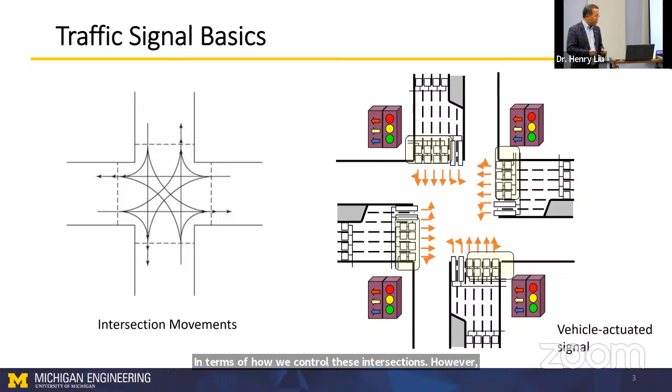However, we don't have a lot of these traffic signals. In terms of the overall number of traffic lights in the U.S., there are various estimates, but the latest estimate is 320,000 traffic signals in the US. That's roughly, on average, one traffic signal per 1,000 people in the US. I would say the majority of these, more than 50%, are so-called fixed time traffic signals, and 30–40% of these are so-called vehicle actuated.

By the way, those detectors could be detectors buried underneath the road, video cameras, or wireless detectors as well. So there are all sorts of detectors installed, location specific to the intersection. How we manage these detectors and the traffic signal timing plans is a very important task for any traffic management agency. City of Ann Arbor, Oakland County Road Commission, every county and every city has these traffic management agencies. They try to maintain these detectors if they have vehicle actuated signals, or maintain these signal timing plans to keep them up to date according to the traffic flow.

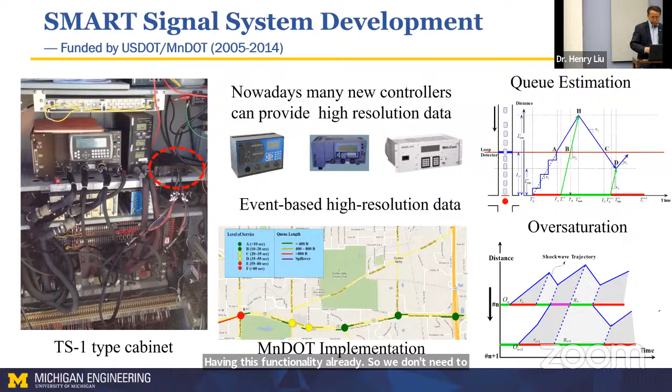After I came to Michigan, I started to work on connected vehicles. At the time, UMTRI was working on the Safety Pilot Model Deployment project. There were 20-some intersections instrumented with roadside units, and 2,850 vehicles instrumented with onboard units as well, so that the vehicles are able to communicate with the intersections through the communication device. At the time, it was still DSRC-based, dedicated short-range communication.

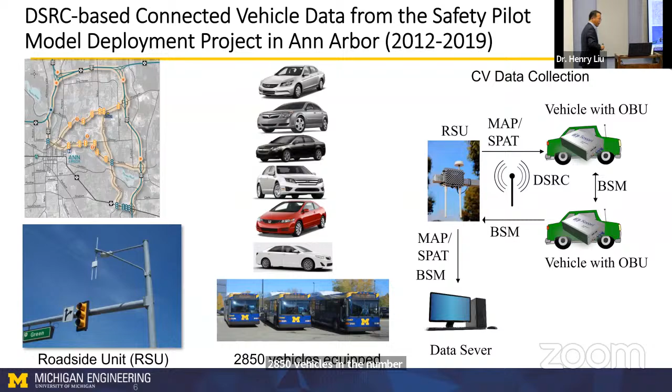So when the vehicle approaches the intersection, the vehicle broadcasts its basic safety message related to its position, speed and things like that. Those messages are received by the roadside unit. So the roadside unit has every connected vehicle's trajectory approaching the intersection. Not every vehicle, because we only have about 2,850 vehicles in the Ann Arbor area equipped with OBUs. So then we started to look at how we can utilize these near-intersection vehicle trajectories to help us manage these traffic lights better.

This is the Plymouth and Green intersection that many of you are very familiar with; it's not far from here. Let's look at phase 2, which is the main through phase from west to east in the afternoon, 3 to 6 p.m. The traffic flow is a lot of people leaving the city of Ann Arbor going home, right?

And so just look at the vehicle arrivals at this intersection. As I mentioned, we know the trajectory when they come to the intersection within the communication range. We know these connected vehicle trajectories. And so all of these are vehicle trajectories. And at the time, this is in 2016.

And so at the time, these traffic lights are adaptive. They work in real time, adaptively reacting to traffic flow. So the start time of the green and the end time of the green is not fixed. They're moving. Depending upon the traffic situation, the start and the duration of the green time is not the same from cycle to cycle.

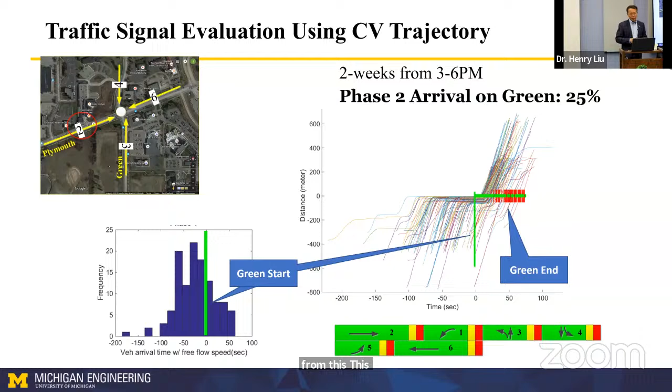Okay, so now look at the traditional detector data. I worked on detector data collection when I was in Minnesota, and after I came here, looked at trajectory data. Each has distinct advantages and disadvantages. Detectors are buried underneath the road, or you have a camera looking in that direction, and every vehicle that passes by can be captured. However, I can only capture that specific location, right? If I have a really long queue and the detector is here, I can't capture that. So it's difficult to use that information to manage these intersections.

Trajectory data, on the other hand, is almost everywhere. If we look at the trajectories vehicles provide, we can see they have very rich information. They approach the intersection, stop 100 feet from the stop bar, stop for like 30 seconds, and then leave. All this information is associated with the trajectory, so each individual vehicle provides very rich information.

However, it's not specific to a location. And we only have a few percent of vehicles that are connected. Not every vehicle is connected yet. Okay, so those are the differences. Each of these has advantages and disadvantages.

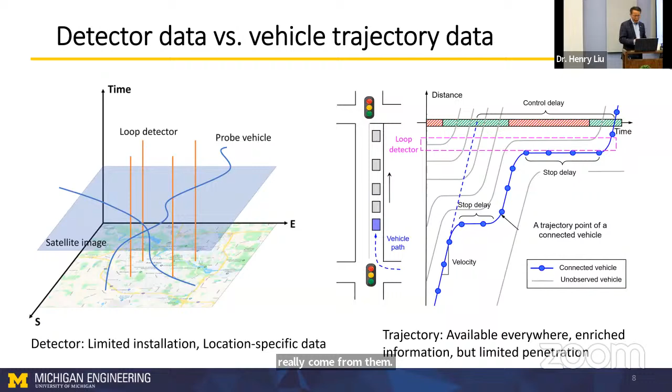Okay, and so then we look at it in terms of how we change our paradigm in terms of how we manage the traffic flow. In the traditional paradigm, we either use the detector data or we get the counts. Sometime when I was young, when I was a graduate student, I still used the counters to get the count myself. And so those are the things you have to do to retime the traffic light.

And then from that, you can estimate speed, density, these traffic flow parameters, you get the counts, volume, and then you put that into a simple traffic flow model. And then you can utilize the traffic flow model to do optimization, and then you can implement that into the real world. And you have to sort of verify that also for each signal retiming.

Well, with the proposed method, we're not gonna do this anymore. We're not gonna rely upon anything location specific at infrastructure. We only look at the connected vehicle trajectory data on the cloud. Okay, so the agency doesn't have to maintain that. So we get the trajectory data. And as I mentioned, each trajectory has a lot of information, has delays, stops, and things like that. We aggregate to get that information.

Now, we also then develop a new model connecting the traffic flow model together with the trajectories. Once we have that model, then we can utilize that new traffic flow model together with an optimization algorithm to optimize the traffic signal timing plan. And then we can implement that into the field, and then that loop runs again. Okay, so that's the new paradigm versus the old paradigm, which really relies upon detector data.

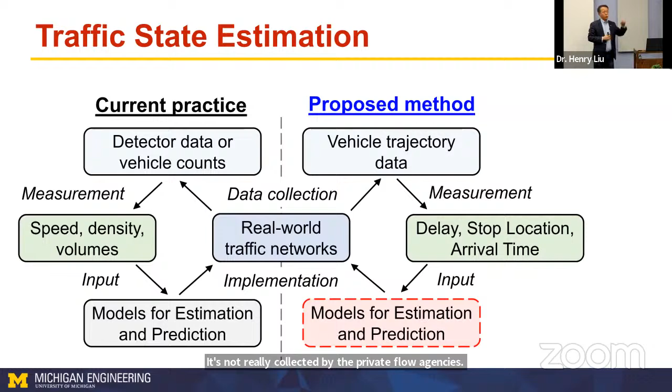Okay, so in our new paradigm, we rely upon vehicle trajectory data on the cloud. It's not really collected by the traffic agencies. But we can utilize that data to help traffic management agencies optimize their traffic signals. And so the difficulty is that we only have a few percent. We do not have a lot. We have a few percent, and then we want to leverage this few percent to do a better job to manage traffic signals.

And then also in traffic flow theory, we don't have a traffic flow model that works directly with trajectory data. All the traffic flow models work perfectly with volume, density and speed data, but they do not have connections directly to the vehicle trajectories. So we have to come up with a new model.

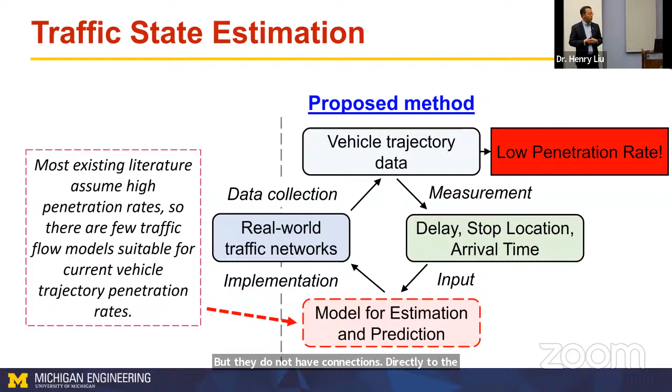Okay, so my early try on the new model, this is 2014, 2016, is, if we want to utilize vehicle trajectory data for signal optimization, the instinct for us is: can we use just a few percent of the data to recover the traffic volume? Because the traditional optimization algorithms rely upon volume data. And so this is our first try.

Initially what we look at is, if you look at vehicle trajectories, we know a few, we don't know a lot. But if a vehicle stops 100 feet from the intersection, I know roughly four vehicles are in front of this vehicle, because the stopping distance between vehicles is roughly about 25 feet per vehicle. So we know there are like 4 vehicles in front of that stopping vehicle.

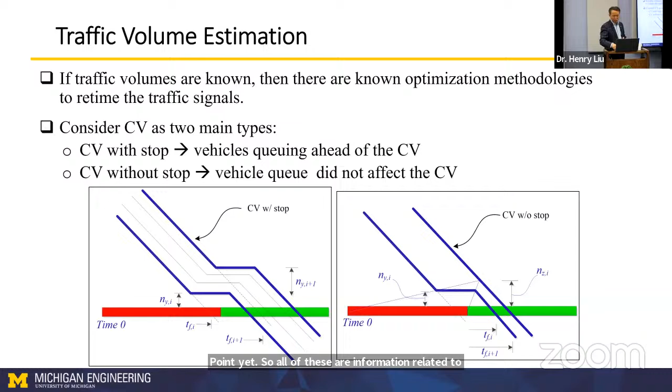So that's volume information. If the vehicle passes by without a stop, I know the maximum queue has not reached that point yet. So all of these are information related to volume. Now with that, we can really estimate the volume through these mathematical equations. So basically, let's just assume there's a random arrival, a time-dependent Poisson arrival.

And we know there's only a few percent of these, where lambda here is the penetration rate, and P here is the arrival probability. And then we observe a bunch of vehicles arrive at the intersection. Some of the vehicles arrived at the intersection and stopped, and some of the vehicles passed through the intersection.

So with that, we can write down the likelihood of the observation. For each vehicle arriving at the intersection, we can write down the likelihood function. And then we can use maximization of the likelihood to estimate the penetration rate. And with the estimated penetration rate, we'll be able to estimate the traffic volume. And that was actually my first student who graduated from University of Michigan. That was his dissertation.

And so that was in 2016. And this was also being tested in that Green and Plymouth intersection. I had students go there taking videos, and then we counted manually and compared with what we estimated from the safety pilot vehicle trajectory data. It works really well.

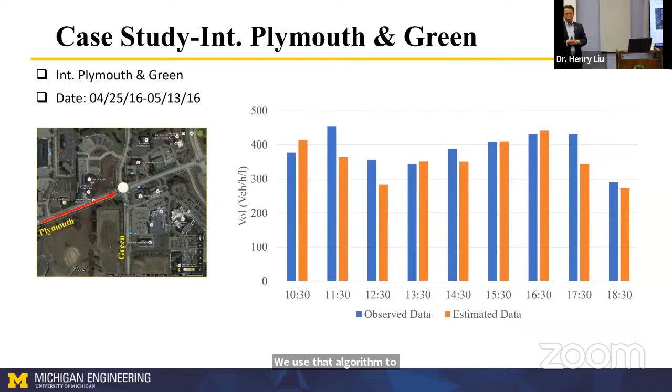And that's why we started to look at how we can utilize this algorithm to optimize traffic signals. And eventually we actually licensed it, so Keith is here, we licensed it to this company called Didi in China. We used that algorithm to implement it in about 20 cities in China. And so I spent 2 years there too.

All right, after I came back, I wanted to implement that in the US, and I wanted to do better than what I did for just volume estimation. Remember, we said we have two difficulties. One is low penetration rate. The other one is we do not have a model connecting vehicle trajectory data with the traffic flow.

Okay, and so we started to look at traffic flow models, because this will give us greater capability to optimize traffic lights. Then we looked at the traditional traffic flow models, regardless of whether it's the Eulerian coordinate or Lagrangian coordinate. The so-called Eulerian coordinate is basically location specific. So you have X, you have Y, and locations. And then the Lagrangian coordinate is a moving coordinate. So it moves along with vehicle trajectories.

And so for these two coordinate systems, it doesn't really change anything related to traffic flow phenomena; the only thing is the representation of the parameters is different. And neither of these has connections directly to the vehicle trajectory, particularly to only a few % of the vehicle trajectories. And so that's why we started to look at our new model.

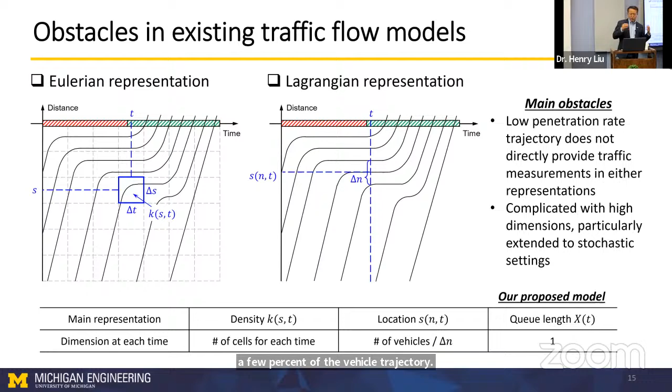So this new model is essentially a simplified traffic flow model that works only for near-intersection cases. We're only concerned with the intersection because the focus here is traffic signals. And so what we use is essentially a simple point queue model. The so-called point queue model is that if you have a vehicle arrive at the intersection and stop at the intersection, you have one vehicle queued up at the intersection.

If another vehicle arrives at the intersection and stops, there's another vehicle queued up. So the queue becomes 2. Another vehicle comes, the queue becomes 3. And then if the vehicle gets a green light, it leaves, and the queue length becomes 2. Okay, so point queue. There's no physical distance. It's all vertically built up in terms of queue length. That's a simplified traffic flow model.

Well, we want to connect that with trajectories. You can see that if we only use the vertical queue, it doesn't really have any trajectory associated with it. So what we did is make another simplifying assumption that every vehicle follows a very simple car following model called Newell's car following model. And so students need to remember those.

Okay, it's essentially free flow speed approaching the intersection and stopping. And then, after a while, it goes at free flow speed. And so that's Newell's simplified car following model, with the distance between vehicles adjusted by the speed. All right, so then we utilize this Newell model. In this situation, we call it the Newell coordinate, meaning our coordinate is no longer vertical. It actually goes along with vehicle trajectories.

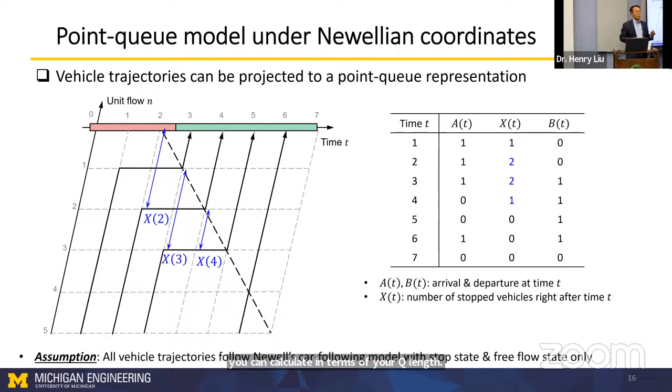All right, so with that, then you can make assumptions now. Make assumptions that say if your arrival probability is following, let's say, a Bernoulli distribution, then you can calculate. Okay, a departure: I know the traffic light, and if it's green, you have deterministic departure. Now you have probabilistic arrival, you have a deterministic departure, and starting from 0, you can calculate essentially your point queue length probabilistically.

Okay, and so that's what we do in terms of our queue length distribution. You can calculate your distribution of the queue length. Now with that, for every trajectory, every segment in the time-space diagram, you can calculate the probability. So that's how we connect our queuing model with the vehicle trajectories.

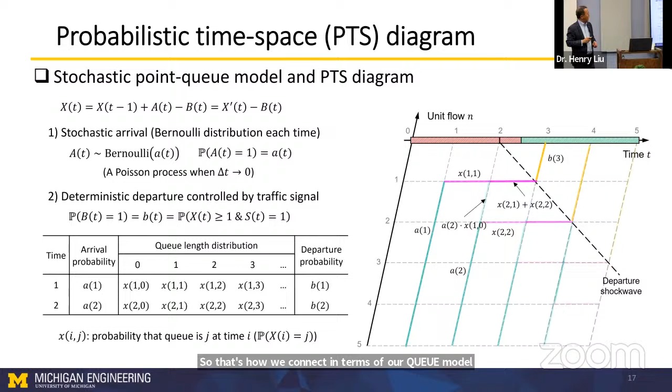Now with that, I can also connect with what we observe. We only observe a few percent of the vehicles. Let's assume that you can calculate the queue length distribution, and your arrival probability at time 3, let's say somehow you calculate, is 0.4. Then you have a few realizations. This probability is 0.4, but there could be no trajectory at all. Then you have a probability.

If a trajectory arrived at the intersection, then you can calculate. The queue length is 0, meaning they can pass through the intersection; you can calculate that probability too. If the queue length is 1, you can calculate that probability. Queue length is 2, you can also calculate that probability, right? So you can calculate all these probabilities together with your observed vehicle trajectories. That's how we connect the few percent of vehicle trajectories with the queuing model.

Then from that I can estimate the penetration rate, because I can also look at when these vehicles depart from the intersection. I can match those, and then I can estimate the penetration rate. I can also estimate the variance of my estimation. With the variance, I can look at how much data is sufficient for me to make a confident estimation of that volume or queue length. Again, that's a more recent dissertation, Dr. Xingmin Wang's dissertation.

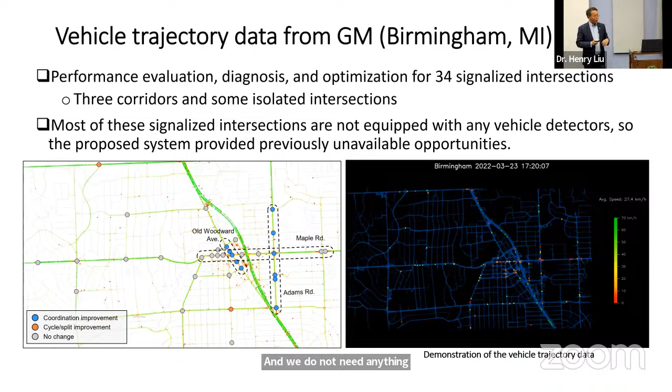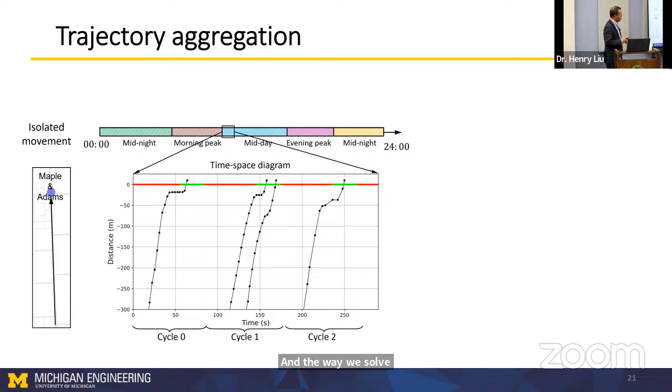Now we look at how, with this data, we can diagnose which intersections have problems and how we're going to optimize those. The way we process this data is, for each vehicle trajectory arriving at an intersection, we align the data together for each intersection. The next cycle is put together on the first cycle, so that for each cycle I know a lot of trajectories. Within each cycle I only know a few, but if I put all of this data together from multiple days, then I have lots of data. So that's how we get this.

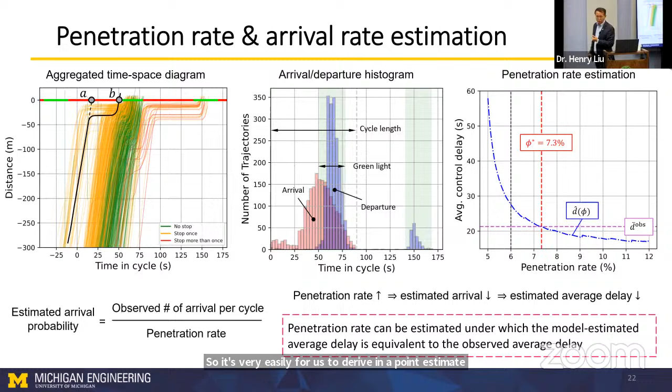Then we can estimate how many percent of the vehicle trajectory data is available. So it's very easy for us to derive a point estimate of the penetration rate. As I mentioned, we can also estimate the confidence interval. So for our estimation of the volume and the queue length, we can also give you what our confidence interval would be. And if you want a higher confidence interval, then you need to accumulate more days of data.

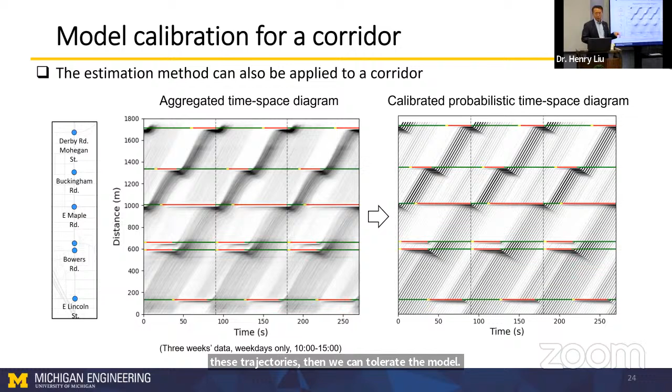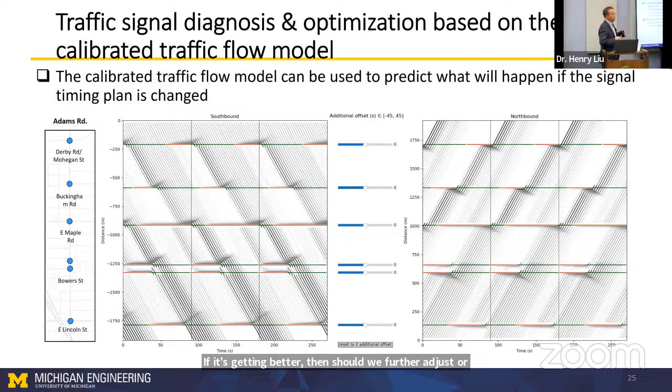Now we can adjust the signal parameters, right? So we have a model, we can predict what's going to happen. Now we can adjust the signal parameters. For example, we can adjust the offset of the signal and see whether the delay is getting better or not. If it's getting better, then should we further adjust or not? Okay. Now we have the data, we have the model, we have the optimization algorithm. We can calculate the signal parameters. Now we want to implement that in the field.

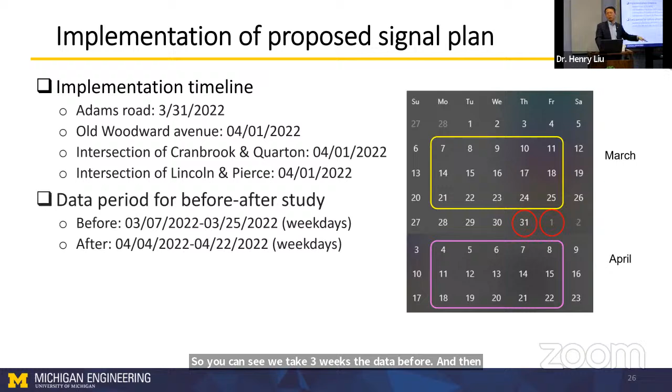Okay, and particularly for major arterials, you might want to favor one approach, and you just want the other approach to not be too bad for the peak hours. Okay, so this gave us the tools to adjust and optimize these signals. And the other good news related to vehicle trajectory data is that because the data is always being accumulated on GM's cloud, it's always available. And so you don't have to do just a one-time optimization as in the traditional signal timing approach.

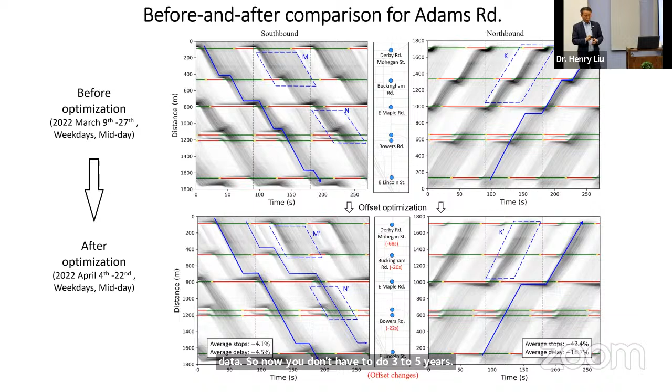You can actually make a little adjustment, and then readjust in a few weeks because there's data available. You don't really rely upon infrastructure to collect the data. So now you don't have to do 3 to 5 years optimization. You can do 3 weeks of optimization if you want. All right, so then we put together this system we call OSaaS, optimizing signal as a service. This is a service to traffic management agencies because we have data coming from the cloud. We can collect the data, estimate the state, optimize signals, implement, and then collect the data again because there's data always being collected from the OEMs.

Okay, so that's our implementation in the city of Birmingham. One of the good news with this implementation is the agency did not really receive any complaints. Sometimes if you do signal retiming and you did not really do a good job, then there are always complaints about your effort. And when we implemented, everything settled, everything looked fine, and nobody complained about our changes to the signal timing plan. And that was a big success, by the way. And so the agencies have been really happy with us.

Okay, so the next step, we were just recently awarded a SMART grant from US DOT. And this is, again, the partnership between Road Commission for Oakland County, University of Michigan, and General Motors. We have about $1.5 million to implement this in a larger area and with more real-time operation of the traffic signals. Previously, we only did fixed-time, offline optimization. Now we want to connect to their traffic control system and do real time. And I can present back to you next time how we do real time. It's another interesting study we are developing.

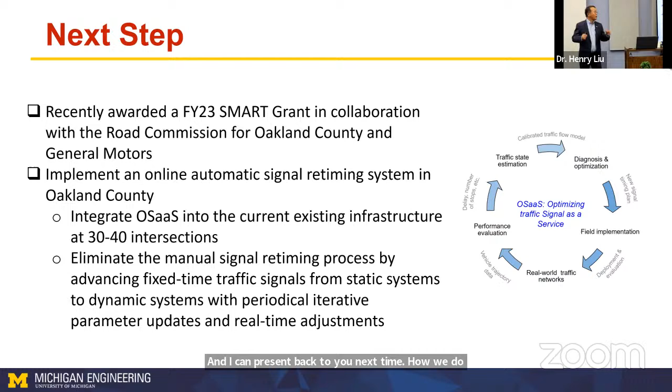And so, in conclusion, we look at it in terms of what we did with traffic signal optimization and collecting high resolution data previously, now utilizing vehicle trajectory data and overcoming some of the challenges, just utilizing low penetration rate vehicle trajectory data. And then we developed a model to connect vehicle trajectory together with the queuing model at the intersection. And then we were able to optimize traffic signal parameters.

And we're hoping to further develop the algorithm so that we can control the traffic signals in real time, not offline.